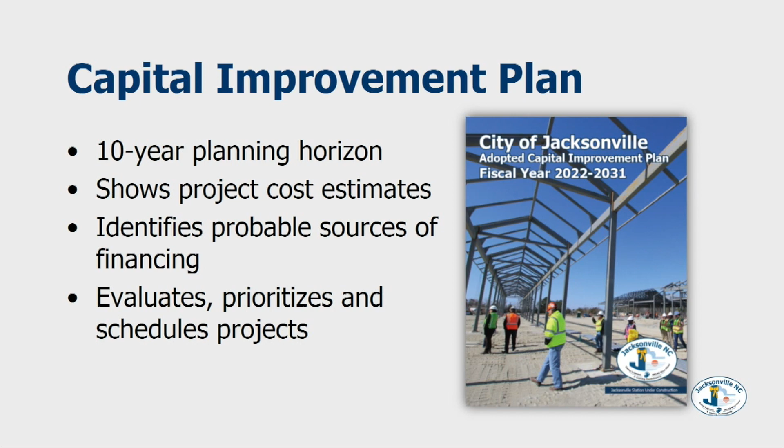I'll just kind of quickly run through a few things. I know you've seen some of this before, but the capital improvement plan is a 10-year planning horizon. The purpose is to identify projects, show cost, try to identify probable funding sources, and then evaluate and prioritize those projects. Ultimately, we use them in programming our rate and our system development fees. A capital improvement project is typically a project that takes 12 months to complete or more. The cost generally exceeds $50,000. I think we have one exception in your book, and I'll talk about that one briefly.

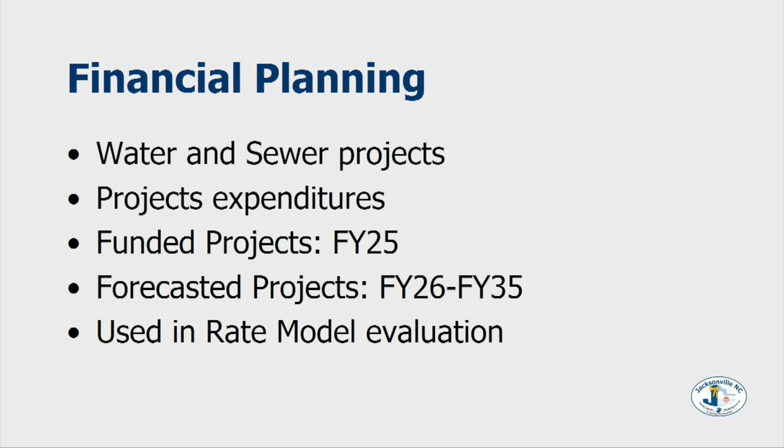And then a useful life of more than 5 years. Again, we use this for financial planning. So it is focused on water and sewer projects that impact the Water and Sewer Enterprise Fund. This 10-year window is from FY25 through FY34. Yes. Did I do that right? So we got a slight typo up there. It should be. The only funded projects are the FY25 projects, so those are what will be used to build our FY25 budget. The forecasted or planning projects that we use for the remaining 9 years are from 26 to 34.

One of the things I'd just like to remind the board, the reason we use a 10-year capital improvement plan, because as you can imagine, we're using master plans, we're using forecasted development from talking with landowners and developers. I hate to say it, it's a crystal ball. We're trying to make sure that we plan appropriately so that we have the right capacity for future growth, as well as replacing and updating our existing infrastructure. We use a 10-year model because that is what's required for our system development fees per general statute.

So with that, we'll kind of jump in. You've seen this format before. We use kind of a little bit of a Gantt chart format. I will talk specifically about the FY25 projects and kind of gloss over the remaining projects because, again, the FY25 projects are those projects that will be funded. So you can see that as we're going through the projects, we have kind of planning, design, and construction. That's the phases the project goes through. What we've done is show you what year each cycle is funded.

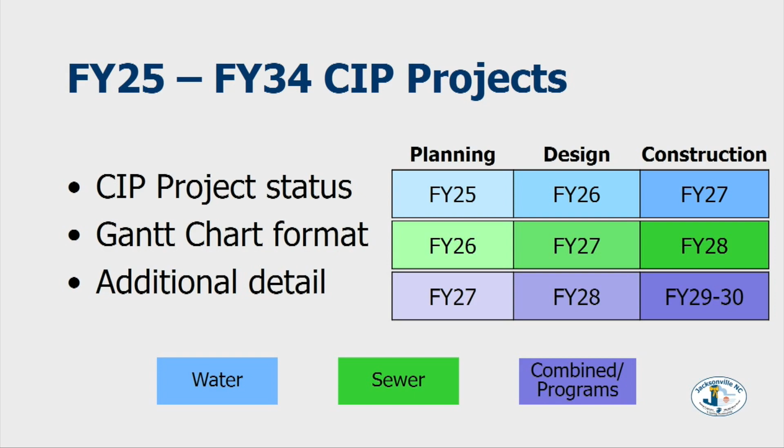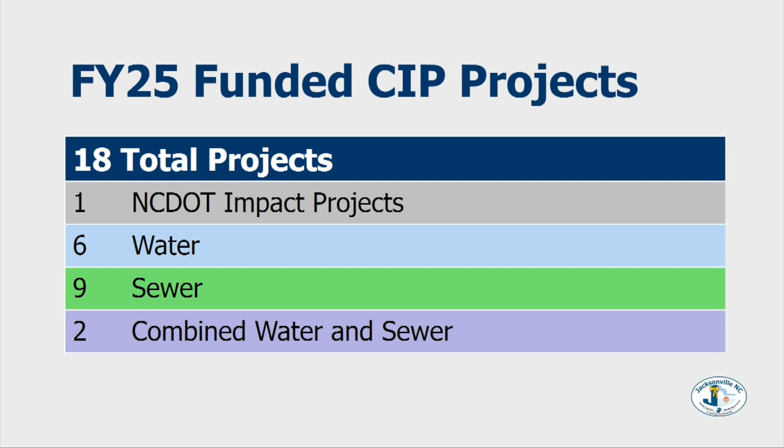And then our combined is purple. So as we're going through this, we have a couple of different types. We have the NCDOT impacted projects, so that is water and sewer impacts from NCDOT projects. And we have water projects, sewer projects, and then combined, and you can see the numbers there. So with that, we'll just kind of jump in.

So for this, we threw all the projects on one slide. These are things we really don't have a choice on. When we're in NCDOT's right-of-way and they do work that conflicts with us, we're responsible for the cost. If we're outside DOT's right-of-way and they expand into our easement, they're responsible for that cost. But there's also a match, I think 50% - if they impact us, they pick up about 50% of that project.

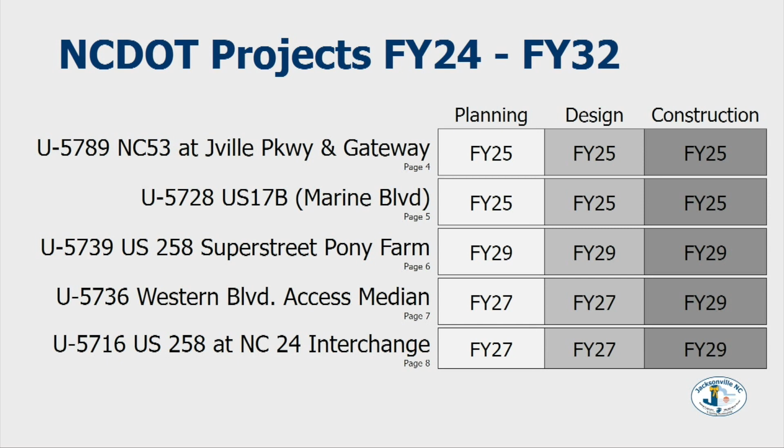So when you say impact, if there's a conflict and something has to be relocated, they'll pay 50% of that cost? Okay. Typically our conflicts come, especially if it's expanding the right-of-way or moving the curb line - it's typically when they have storm drainage. That's where the conflicts typically happen.

So you can see the projects here. There's only 2 identified in FY25. We have a couple that fell off because the conflicts are primarily taken care of, even though we haven't received a bill. For example, Gum Branch Road - all the DOT work you see there, we have a water line that goes all the way out to Rock Creek. We had some impacts there, and that money's already set aside, and that work's been done. We're just waiting to receive bills.

And the same for, I don't know if anybody's been out in the Piney Green area, but the Commerce Road extension is complete and opened up, and it makes a world of difference. We had a meeting with DOT today, and I asked them if we could go ahead and extend that all the way to Western because it looks very nice. But we had some water and sewer conflicts there.

So, yes or no? Yeah, if we pay for it, I think. So you had some water and sewer conflicts for the Commerce extension? We did. We have a sewer force main that ran through the area where they extended, and it goes out to North Marine Town Center. So it serves that Circle K? Yeah, Circle K and CarMax and Stevenson Toyota.

Work is proceeding pretty well. The right-of-way's all been cleared. As you can see, we actually have pipe going in the ground. Who's doing this, Carolina? This one's Carolina - Eric Ward? I think, yes, Eric Ward. Yes sir, Carolina Utilities. Yep, that's right.

The next contract should actually be out for bid this month. If you remember, we talked about staggering those contracts a little bit so work could get underway on the first one, progress, and then we could bid the second one. So we're interested to see where that comes out.

The size of that pipe again, is that 36? I thought - yes, 36, sir. And there's been several conversations about this through the years. If you'll remember, I think this started off at a $25 million project way back when - $20 million project. As you can see, the total cost estimate right now is about $43 million.

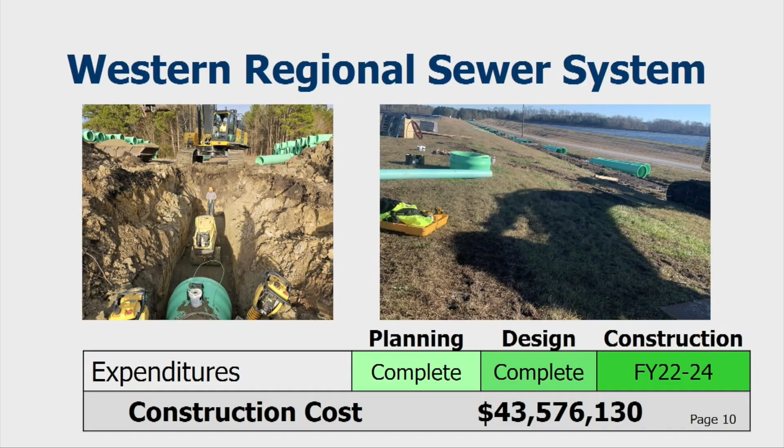Is this both phases? This is both phases and the pump station. Where's the location - you said you're boring under the river, where is the proposed location? The proposed location is actually in the back of Williamsburg Plantation. Okay, and we have a gravity sewer main that runs from the intersection of Western Boulevard and Williamsburg Parkway.

So where Kitchen Lighting and Design is, that intersection, all the way up Williamsburg Plantation, it follows the creek between that subdivision and Woodlands, runs almost to the river, then behind Northwoods and heads to Brookview. It will actually be built right off of that existing gravity sewer, and we'll intercept that sewer and turn it into this station.

So that's all part of this portion of the project. And then we'll get there, but in a few minutes you'll see we have future expansions of this project.

So it's fully funded, all the funding's in place. We had $32 million, I believe, in grant funding that helped significantly. And then the remaining, we're considering going out for revenue bonds. In order to do that, you have to have 75% of the project bid, so we can't go out first. We have to have it bid to get the revenue bonds.

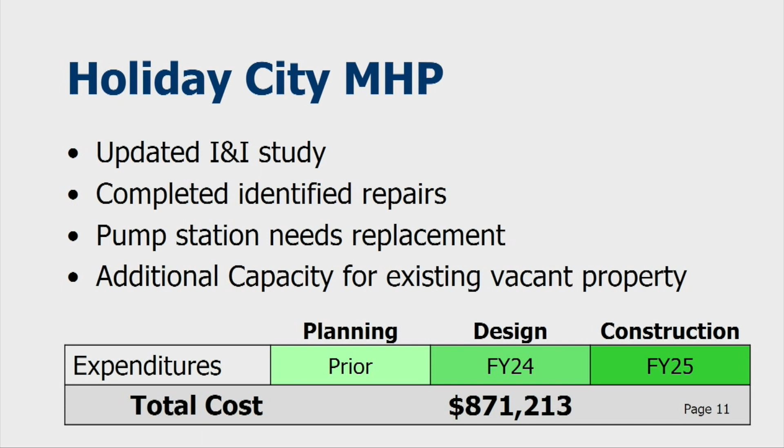And then we did an evaluation, and what we found was the existing pump station, even after all of that's been done, is at capacity. There's still one or two decent sized tracts of land in that basin to be developed, and one of those is actually up for sale, and they're looking at putting multifamily there. So this project is probably going to require a little bit of an upgrade.

Tidewater has this design and they're working through it now. So hopefully we'll see this. We're hoping the design will be complete by the end of this fiscal year so we can get it out for bid and construct it next year.

This is a new project in your CIP, the Commons Pump Station upgrade. We are having significant development pressure in the Ramsey Road, Drummer Kellum area. The city has an existing pump station that was constructed with Country View and Harvest Meadows, and we already have a 152 or so lot subdivision that's under construction now. Matter of fact, there are houses people are living in. And they're talking about expanding that into some existing vacant property.

This actually comes through the Commons lift station, which was originally sized for the Commons and a little bit of area outside, but not as much as we're talking about. So with the continued development pressure, this station is going to require an upgrade. The number that we're using is following similar size stations that we've seen in the past. Again, we haven't done any planning, we haven't done any design. We recognize, we track the capacity of every station, and we recognize that we're at the point where we're going to need additional capacity in this station.

Can this not, didn't we run pipes up 17 and a crossover to that section? Not yet, but we'll get there. Oh, we haven't got there yet. We haven't got there, I thought we'd already done it. All right, never mind. We'll talk about that one in just a minute.

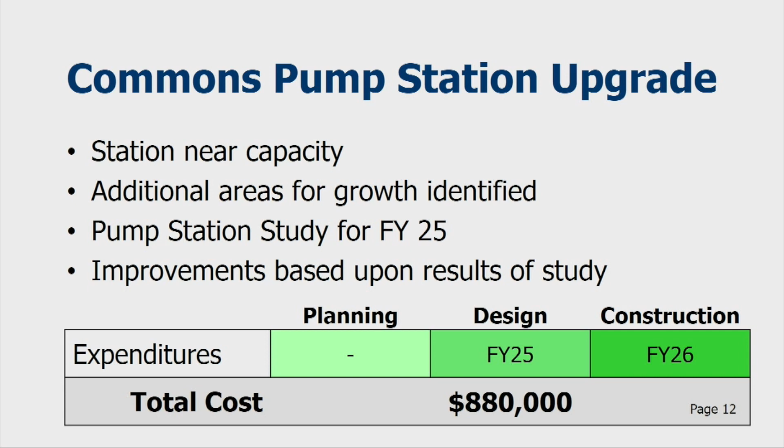All right, and then this, of course, this is on page 12. As we look at this area, we need to look at whether there are other options. So this project is in there. It is necessary, provided that this is the direction that sewer comes.

Brinson Creek Pump Station, this is an update to the pump station. Brinson Creek has a challenge with hydrogen sulfide gas. It actually causes problems with our discharge pipes, the concrete in the wet well, the pump bases. I don't remember when this station was renovated, but I think we're going on about 15 years now. I was involved, but it wasn't recent.

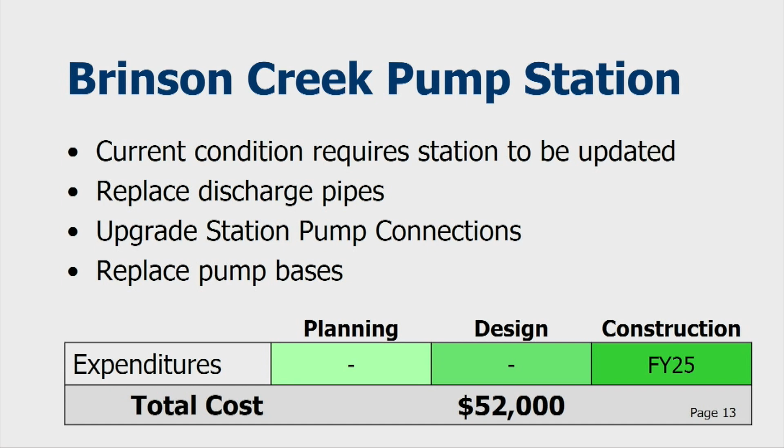So I think it's been about 15 years, and it just needs updates. This is kind of, for lack of a better description, internal plumbing updates. So where is this? It's located kind of behind the fairgrounds. It pumps directly into our force main. It actually sits at the upper end off of Broadhurst Road, behind the VFW and the fairgrounds.

And then our I&I project, this is a recurring project that we do every 3 years. This is just the next iteration of that project. So it's an ongoing program. We've talked about this many times.

What I will say is we track our sewer flow daily, but we evaluate it every month. And if you think about the growth the city has seen over the last 10 years, with our I&I efforts and other things we're doing, our capacity at our plant is climbing slightly, but remaining fairly static. So if you look at the development we've had in the last 10 years, I think the most recent numbers we've looked at, we're only up maybe 100,000 gallons or so.

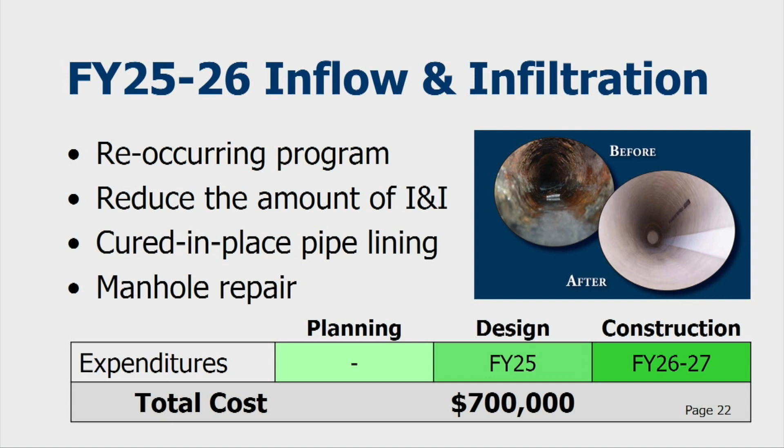So basically, the I&I repairs you're doing are allowing for future growth. So while 700,000 every 3 years is not cheap, I'll remind the board that when we did the 3 million gallon a day expansion at LTS, it was $48 million. So if we keep this up, we can extend the next expansion out further.

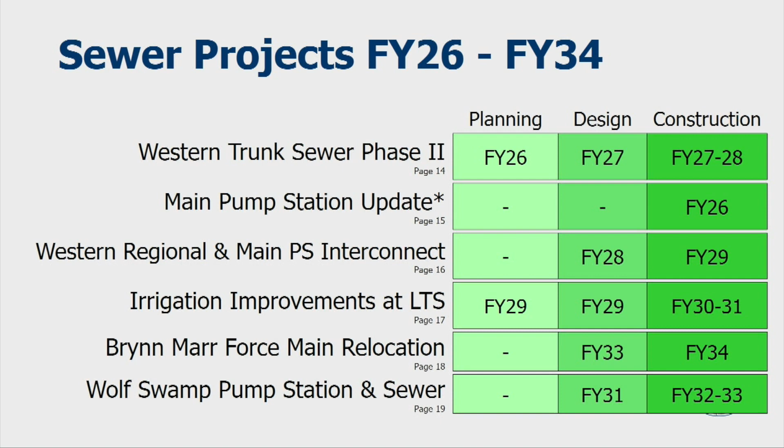And then these are the planning projects. I won't go through these individually, but just to point out a few, the Western Trunk Sewer Phase 2 I talked about. So this would be the upper end of the Western Regional sewer system we talked about, from essentially Williamsburg Plantation to Carolina Forest. This would actually redirect the Carolina Forest force main into this new system, which will take a lot of flow off of an existing at-capacity gravity sewer main that runs down Mill Creek. So it will remove all of that flow from the existing system and put it into this new system.

And then main pump station update, it's similar to Brinson Creek, but significantly more because we actually have 4 pumps and motors. They're turbine pumps, so they're a motor with a shaft to a pump. But the mounts need to be replaced, the bases need to be replaced. The motor housing is in pretty good shape because it's on the top level and it's fairly dry. It's the pumps and the discharge pipes and those kinds of things that we need to address.

And some of that was done in 2011 or 2012 when we did the expansion, but the others have not been, so we need to come back and pick those up. And the rest of those projects have been in the CIP for quite a while now. The last two you'll see are getting pretty far out, really near the end of the window. They are important projects, but depending on how the city grows will depend on when those are needed.

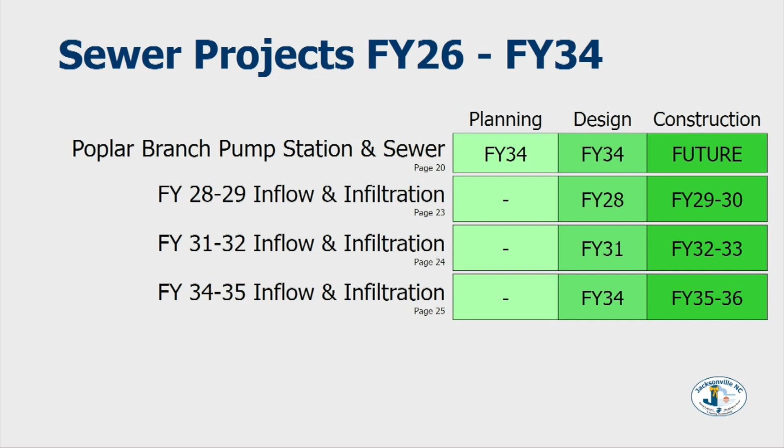Any questions on sewer projects?

For combined water and sewer projects, again, these are both water and sewer, and they include expansions or extensions, and they include rehabilitation. For the first project, we have the Drummer Kellum Road Sewer, which is the one you were asking about. This would actually extend water and sewer across 17 at Tundra Lane, I think is the name of it. It's the road right beside Stevenson Toyota, at North Marine Town Center.

So we have a manhole there, and we extend that manhole under 17 and up to not quite to Drummer Kellum Road, but close to the Drummer Kellum Road intersection. This became part of the CIP, and I don't remember the exact date, but probably back in 2016 or 17.

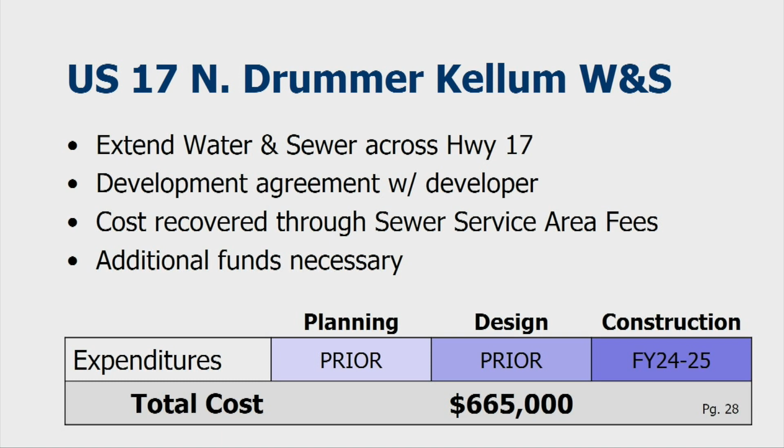A developer owned a fairly large commercial tract and wanted to subdivide it into 5 lots. They came to the city and entered into an agreement that if they annexed it, we would extend water and sewer across, but recover our costs through sewer service area charges, where they pay the system development fee plus a little extra to cover those costs.

But that's the extent of this project, just getting it to the other side and up a little bit. It's a fairly small project. It's already designed and already permitted, but it involves 2 bores under all of Highway 17, which is the bulk of this cost.

So who's going to tie into it? There's actually a proposal in front of city council that they approved at their January meeting, the second meeting in January. They rezoned that area, which was part of the original annexation. It's my understanding there's potential development secured behind that piece of property also, so all of that would come there.

But at some point there's a break between that area and the Drummer Kellum Ramsey Road area. So what we've got to figure out is the best way to serve that corner—whether to reroute a force main to get it there, and whether the downstream pump stations can handle it. This goes through the middle of town to the Bears pump station on Bell Fork Road, which was redone within the last 8 to 10 years, but I don't know how much capacity is left in it. Part of it depends on what's planned for the project we're talking about, and what capacity remains in our downstream lift station.

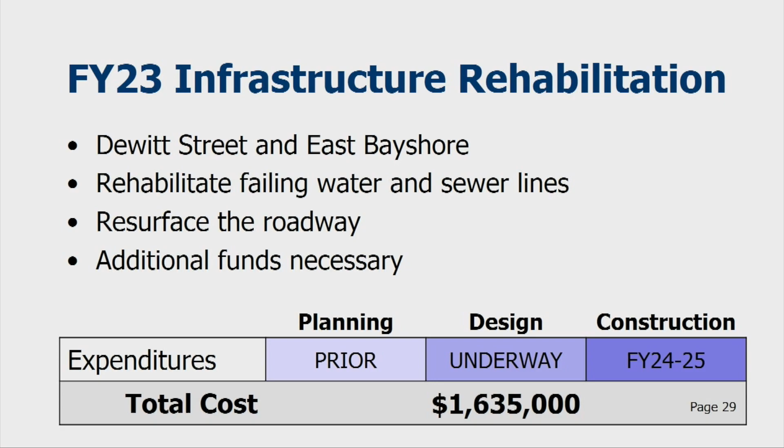I'll be honest, I thought it was going to be more, so I'm still a little nervous. But they've actually done preliminary engineering work, so they have the scope of the project. Hopefully this will come out fairly close to where we have it estimated.

When I say it's the worst road in the city, it's literally rated the worst road in the city—maybe the surface. Part of that segment is rated at like a 15 or 13 or something, and it's the part where the sewer is the worst. So we're excited to see this project progressing. We added the big change to this—we added funding in FY25 to match the engineer's cost estimate.

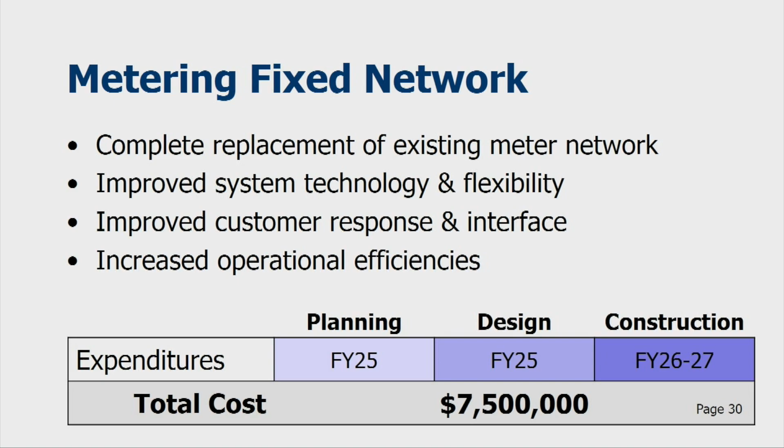Coming into the window, we have a planning study for the metering fixed network. Mr. Thomas, you may remember when we went to AMR, the automatic meter readers. I know it's been at least 15, maybe 18 years now, but we're having trouble with some of that system. There's obviously newer technology with greater capabilities, so we will be evaluating replacement of that system.

It's about time, it's getting hard to get some of those parts. Some of the things we will evaluate: right now the way our AMR works is we send a city vehicle around and they drive routes, and there's an antenna on the meter that talks to the car as it goes by. That's how we do our meter read, once a month.

There's other technology now where you can have a fixed network that talks pretty much continuously, very similar to how power meters work. Anybody that uses the app from their local power provider can go on and see usage and those kinds of things. That technology is available to water systems, to water meters. I don't know what the cost is, but that's one of the things we will evaluate.

The great thing is it may be a large upfront cost that we can use to save manpower over time as we grow. It also helps us identify leaks faster, and it will help homeowners identify leaks faster. So there are some great opportunities and efficiencies there, but it's also a question of what cost will that come out at.

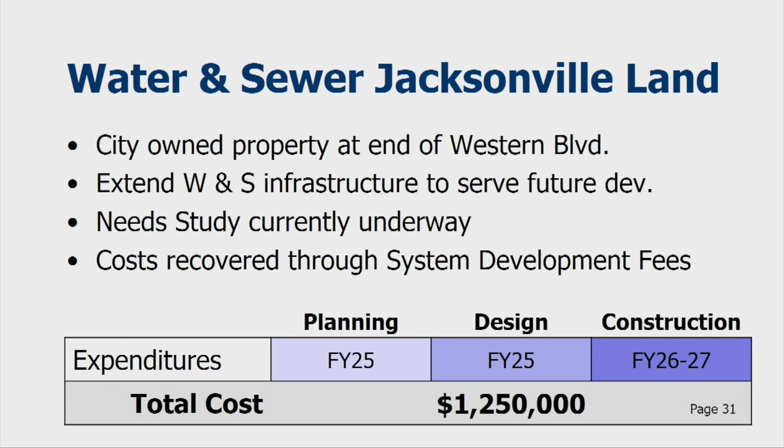It's in '25, so that's the planning - the money's not available yet. What page are we on? 31, sorry, I'm doing this from memory. We don't have any money currently, so the planning study would basically be an alternatives and cost benefit analysis that we'd do in '25, and then design would follow that initial planning study.

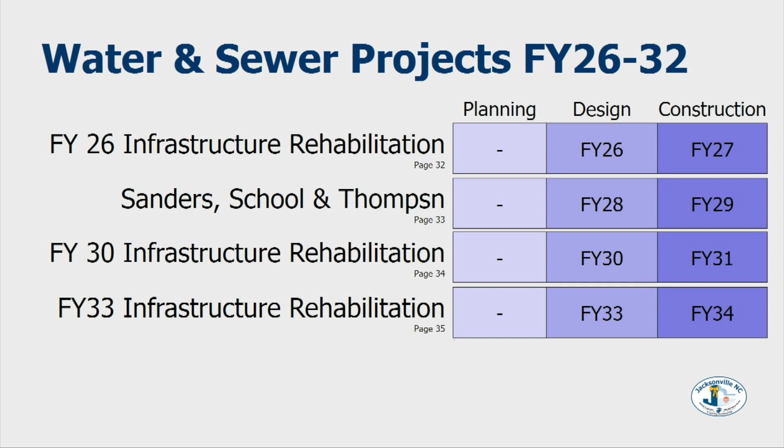These are the future projects we've identified. We have FY26 infrastructure rehabilitation. You'll see we have not identified the water and sewer lines for that project yet; we'll be working with utilities maintenance and using our work order systems to identify those.

And the same for 30 and 33. But we have identified - and I just realized Thompson is misspelled, I apologize - Sanders, School and Thompson, which have been identified and programmed in '28 and '29. Any questions on those? All right, to our water projects.

The first project up, I know we've seen this a few times. What I have to say right now is we're kind of on hold. I talked about this project a little bit last time - we were going to rehab well 1 and drill a new Black Creek well to replace wells 2 through 4.

This is something we've talked about at length with the state. The good thing is you end up spreading out your wells and not putting so much demand in one area. In addition, when these wells were originally drilled, we were 100% Black Creek. We're not as reliant on the Black Creek now because of the new water plant, the Castle Hayne wells.

The challenge is when we did the full water testing for well 1, we found high natural levels of fluoride. If we move forward with that project, it will force us to do an annual statement saying that fluoride browns teeth and at certain levels can cause bone disease. So we'd prefer not to go there. Again, it's naturally occurring - we don't feed fluoride, we have natural fluoride in our water - but we don't currently have to release that statement, so we'd prefer not to spend a bunch of money to get there.

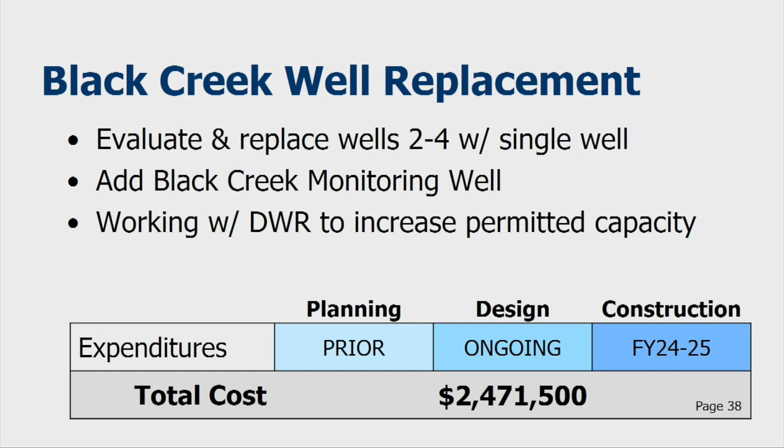So right now we're looking at other options. I've identified a couple of locations we can go look at, and one of those is actually not near well 1 or well 2 - it's off of Gum Branch Road. We're trying to identify alternatives to this. In addition, we're also working with the state on trying to recover some of our capacity in the Black Creek, which would be the point for the monitoring well. Right now we're permitted at 1 million gallons a day.

And we're holding there. What we're trying to do is gain back 1 million so that we can go to 2 million gallons a day. For us, it's a major benefit because it allows us to balance what we use from the Black Creek with what we use from the Castle Hayne. For the benefit of our ratepayers, Black Creek water is cheaper for us to produce. So if we can use that to offset growth in demand at a cheaper rate, it helps our ratepayers too, and it helps us better manage both aquifers. We're not putting too much pressure on the Black Creek, and we're not putting too much pressure on the Castle Hayne.

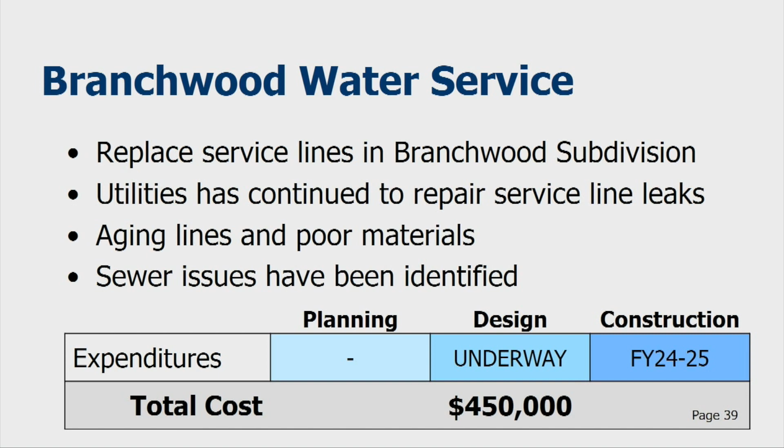The Branchwood Water Service is a project that's currently underway. This project came out of our maintenance division. We have replaced numerous water services in this area. Most of the problems we have are not water main problems, they're actually water service problems. It's thin wall PVC, and I hate to say it, you look at it funny and it seems to leak. So this project will replace as many as we possibly can with that, and then we would look at continuing that with a future project.

Right now, when we respond to water leaks in the Branchwood area, we go ahead and replace from the main to the meter. We're doing that because we know if we don't do it now while we've got it dug up, we will have to do it with this project. So it didn't make sense to continually go through there, dig up a service, and put a 3-part union on it. I hate to say this, but we went to one address for a water leak and dug it up, and there were already two 3-part unions on that same service. That was the third time repairing that one service. So it just makes sense to go ahead and do the work while we're there, and then we track those so we can back them out of the project. Saves money in the long run.

The challenge with this project is, as we're doing that work, we're also looking at identifying streets for street paving, so we want to be prepared once this work is done to pave those streets. There are some sewer repairs needed in that area that we don't have in our CIP anywhere, so we're going to try to pick those up with our I&I project if that will work, since they do have I&I issues. If we can do that, we'll coordinate this project with that work, so hopefully we only impact residents for utility work once and road work once, instead of water once, sewer once, and road work once. This will be a coordination challenge, but that's what our goal is.

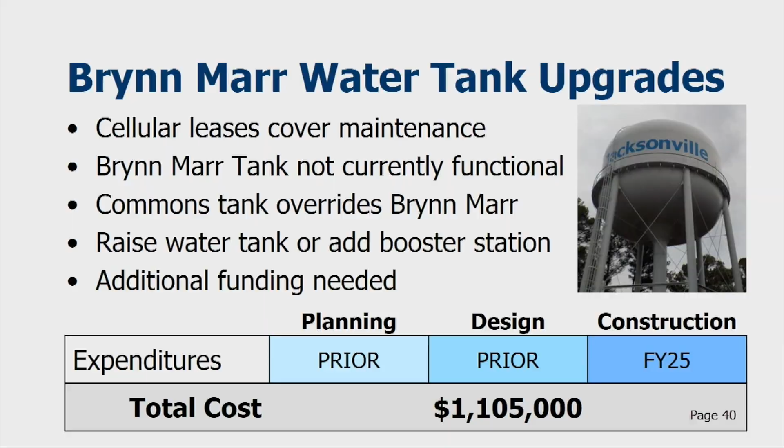And then we have Brynn Marr water tank upgrades. This project was identified following Hurricane Florence. The only thing we use that tank for right now is cell phone towers, so we do get revenue from it. But the Commons tank is at a higher elevation in town, and that tank itself is actually taller than this tank. So when we put this online, it pushes water right out the top. Once you fill it, there's no way to get water out of it other than to isolate it and dump it. So we really don't want to lose this asset. It's a 500,000 gallon tank, and it does provide benefit when preparing for a hurricane or natural disaster so that we'd have use.

In addition, right now we have concerns with taking the Commons tank offline because we don't have another tank on that side, period. So by adding this booster station to this tank, it will give us redundancy so that we can take the Commons tank offline. Right now, the Commons tank is backlogged on work - there's some coating work we need to do, and we've actually pushed that off.

Two years now. How much higher does the tank need to go? We evaluated raising it, and it was cost prohibitive. It's just cheaper to put a pump. So you're not going to raise the tank? We're not. And originally, the engineer recommended a 1.5 million gallon a day pump.

So the idea was that we could turn this tank over 3 times in a day if we needed to. It gives us greater capacity and flexibility. The problem is, once you get over 1 million gallons, the price almost doubles. It's just the size of everything - the size of the pump, the power required. If you have generator access or a portable generator, it's got to be larger. It completely changed the cost of this project.

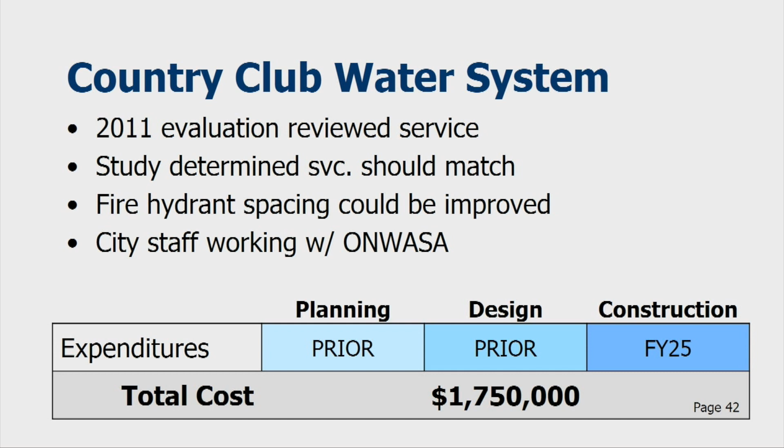So it didn't meet fire hydrant spacing. The problem with fire hydrant spacing is you have to have a minimum of a 6-inch main, and most of the streets don't have 6-inch mains, which is why they don't have fire hydrants. Most of them are 2-inch.

So right now the system is still owned by ONWASA. We have been working with them, trying to identify areas where we provide service outside of city limits that really doesn't make sense for us to provide, and they provide service to this area. So what we're trying to do is line up accounts and possibly do a switch so that both entities remain whole revenue-wise, which is the goal. We don't want to - we would love to get this area, but we don't want to cause problems for ONWASA either, because there's, I don't remember the total number, but I think there's 400 or 500 services on that system.

Because it's not just Country Club, it's the Perry Drive area, north of that up to Country Club, and then across to include Dixie Trail and Sunset Acres. Highland Forest is on ONWASA water but doesn't have sewer, so it's actually outside the city. So this project's scope is, once we work out the agreement, it requires capital funds to actually take the system loose from ONWASA and tie it into the city, and then replace mains to get that fire protection that we need.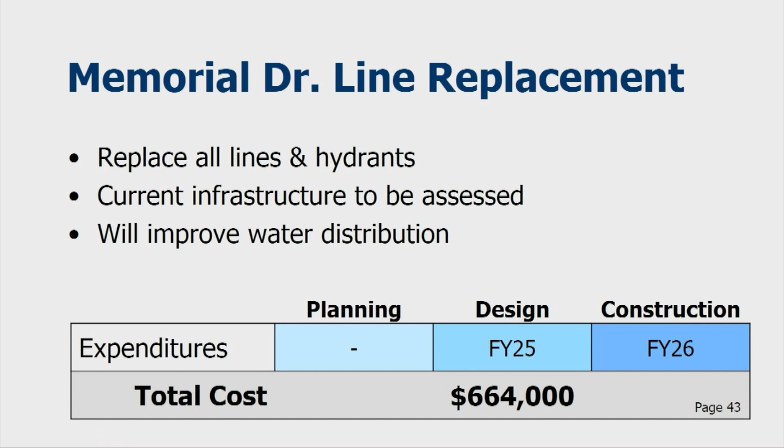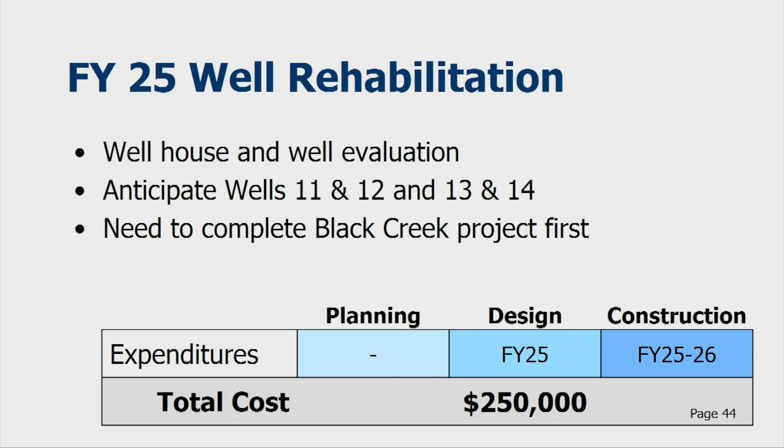And then we have the well rehabilitation, which is an ongoing well project. We've got it spaced out, and the purpose of this is to upgrade the well houses and components, because these wells were constructed in the 60s and 70s. We do need to complete well 1, or the Black Creek project, first, so that we don't take these wells offline before we have that capacity replaced.

This is a new project in the CIP for FY25. We had an evaluation done of our ground storage tank. That tank was completed in 2010 or 11. Plant was put online in 11, I think. So the tank was probably actually completed in 9 or 10.

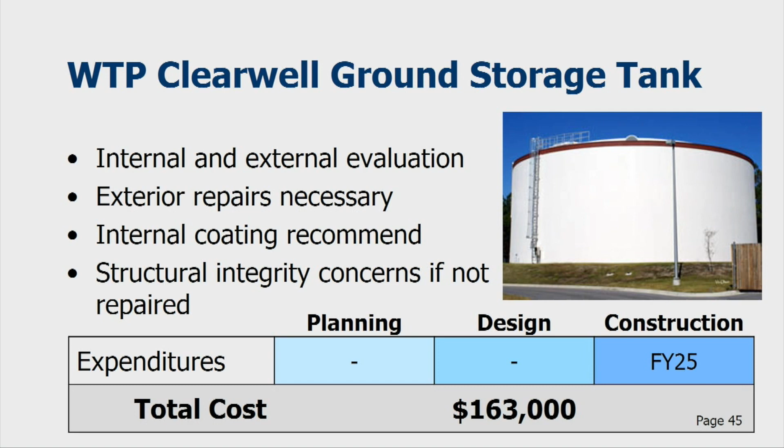But it is a wire-spun concrete structure, and some of the concrete is beginning to crack, hairline cracks, which allows water infiltration. And I think everybody knows, but concrete is not waterproof. It's actually porous, so over time water does permeate through concrete, which is why houses have vapor barriers. So if anybody's ever wondered, but the challenge here is we're starting to see some of that corrosion leach through.

So we need to get this done. We have 2 options to fund this. The first option is just to fund it outright as a capital project. The second is to roll it into our asset management plan, which is what we have for our water tanks, because the same company would be doing this work. But this saves us, I want to say, about $30,000 or $40,000 if we just go ahead and knock it all out at once.

So that's what we're proposing to do in the CIP. And then the additional water projects that we have planned, you can see those. The only thing I'll point out is, along with the water tank at the water plant, we also had the mixing tank evaluated, and these include both internal and external. The mixing tank also is a concrete structure, and it needs repairs also. So we would do one in 25, and they said the mixing tank we can wait on a couple of years. We don't need to push it too far, but the idea would be to pick that up in 27.

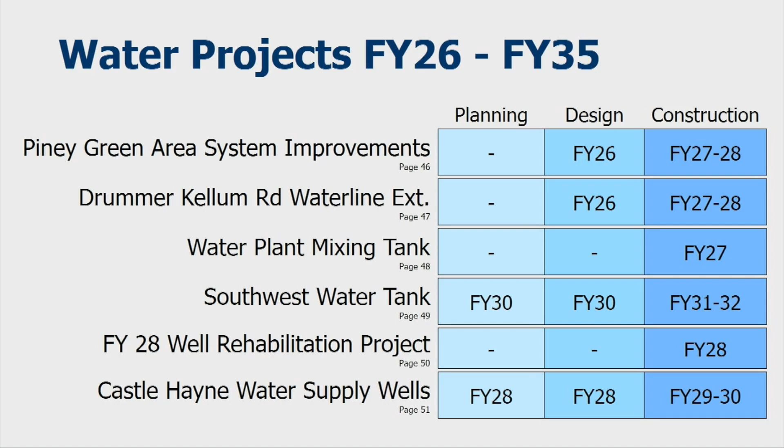Question: when you renovate these concrete structures with this new material, do you know what the life expectancy of that is? So what they would do is probably point it up to seal it, and then put a coating on it, an epoxy coating. I don't know what the life of that epoxy coating is, but what we put on our water tank, our metal water tanks, is about 10 years. So I would expect it to be similar, which explains why it's time to do it.

Almost like putting a sock on one of those tubes. It's just a larger scale. Yeah, this one's more like painting a car, like a rental. Yeah.

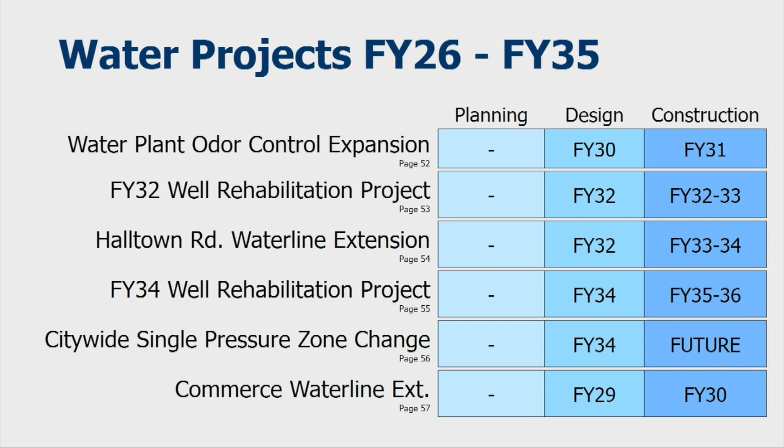So these are the rest of the projects. One you'll see up there that I'll point out coincides with the southwest water tank. You'll notice one of our master plans identified a water tank in the southwest area, generally in the vicinity of Yopp Road, to address some pressure issues that we will continue to have as that system continues to grow, or that area continues to grow.

We don't have a water tank on that side of the river at all, so if there's an issue, it's actually supplied from the Black Creek wells. Tying that with the citywide single pressure zone, the model showed that if we used a similar tank to what we have at the Commons, we could use that to go to a single pressure zone across the entire city. Right now, we have 2 pressure zones.

One's about 65 PSI, give or take. That's generally the area served by the Commons tank, so generally down Western Boulevard, into the northeast of that. So if you're coming up Western, it's kind of Western Boulevard and the general area to the right, headed towards 17. The low side is actually kind of from between Bell Fork and Western and the rest of the city.

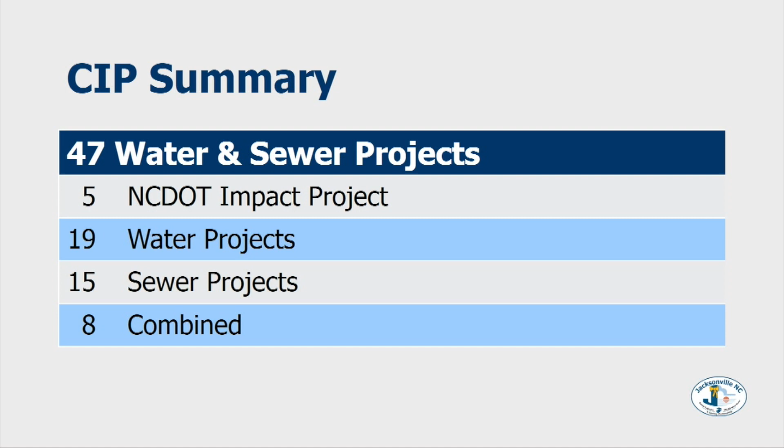You'll notice we have 8 carryover projects that are funded or mostly funded. I talked about 2 that we needed to add funds to. And then we have 8 new projects, which is a significant number—typically we have 5 to 6. But some of those are because of pressure we're seeing from development, or like the water tank, kind of a one-time thing we need to address.

So with that, this is our timeline. Tonight we've given you a draft of the CIP. We will give you time to go back and review that. Feel free to come next time with questions. Can't guarantee I'll be able to answer, but I'll do my best.

In the meantime, we are going to get with finance, get these projects programmed, and see what our rate structure looks like. Like we've done in the past—and as we were building this presentation and looking back at last year's, I think there were about 3 or 4 projects we shifted that were future projects to help balance that rate model. We will do the same thing. And if we move something, I will let you know what that is, where we moved it to, and if that would have significant impacts.